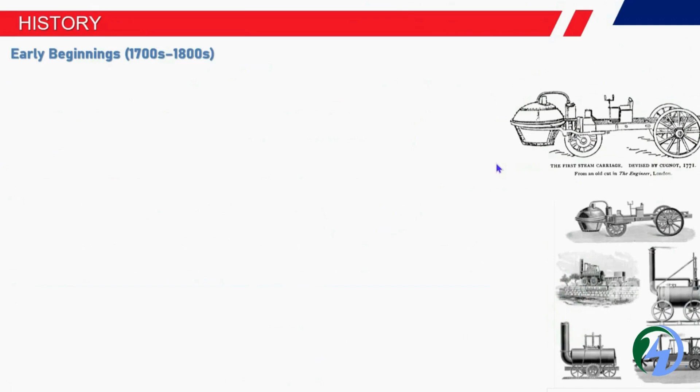This is a small introduction about automotive. To begin to know about its history, it started in the early 18th and 19th centuries with steam vehicles. It was developed by Nicolas-Joseph Cugnot, who built the first steam engine, but later it only supported limited weight and was inefficient.

Then later they came up with the IC engine - internal combustion engine - invented by François Isaac de Rivaz. He developed it using hydrogen, as a combination in the internal combustion engine.

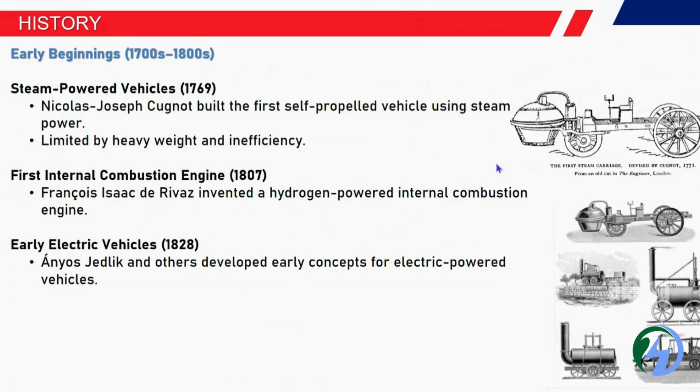Later, in 1828, they started with the battery. Ányos Jedlik and others developed electric powered vehicles.

After that, most of the activity between 1885 to 1886 saw cars drastically starting manufacturing. Karl Benz introduced the Benz Patent-Motorwagen, which is the first modern car, introduced with the internal combustion engine.

Later, Gottlieb Daimler and Wilhelm Maybach built the first gasoline-powered motorcycle, and later they started designing different designs to attract customers.

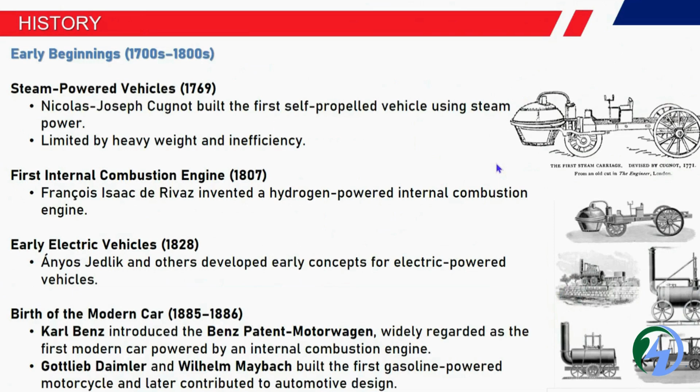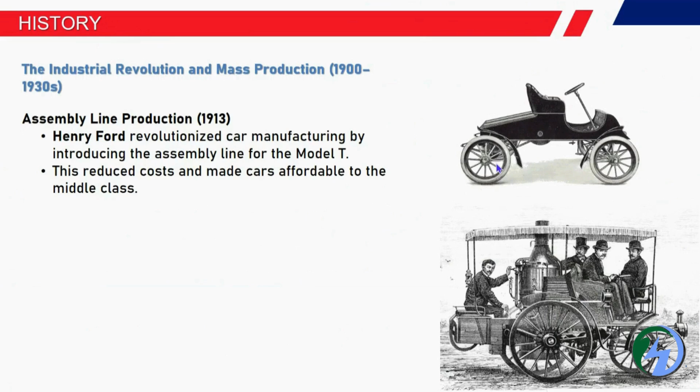Next, mass production started from 1900s to 1930s, where many investors like Henry Ford introduced new models, reduced costs, and made more affordable prices for middle class people. Later, the automotive industry boomed in the 1920s, in the major U.S. market.

Companies started investing more and more in cars, like Ford, General Motors and Chrysler. They dominated and invested heavily in major brands. At that time, cars symbolized freedom and prosperity for those who had them, allowing comfortable journeys.

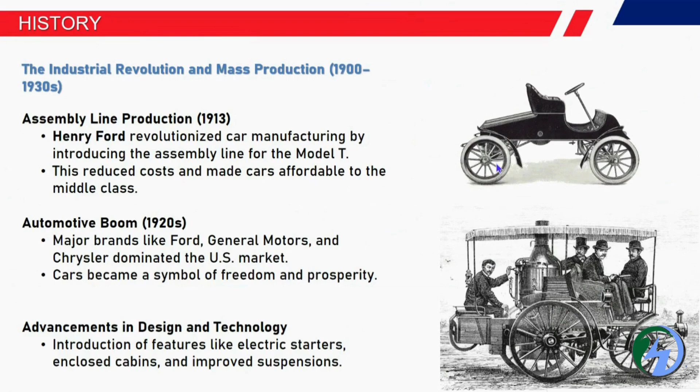They improved the technology and design of different models towards safety, security and comfort. They added starters, cabins, and suspensions. More and more features were added over time.

Later, from 1940 to 1960, many designs were established worldwide, from Russia, Europe and Japan, as other countries started manufacturing cars. Volkswagen and Toyota played a major role in expanding the automotive industry, and in Japan, vendors like Toyota, Honda and Nissan emerged.

Nissan built cars with IC engines where fuel efficiency kept increasing. That's how Japan developed good engines and attracted customers at that time.

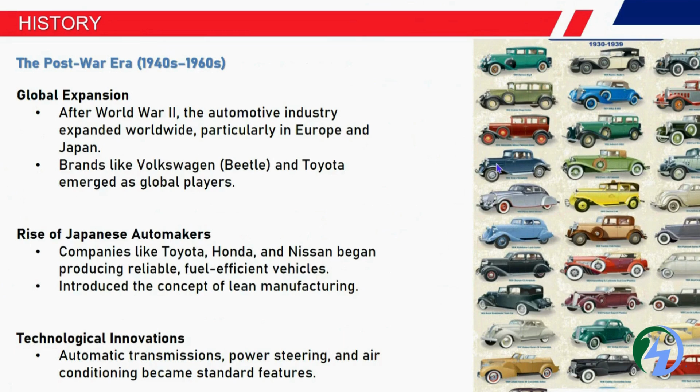Later they started working on safety concerns like airbags and air conditioning, along with comfort-related features such as automatic transmission, gear systems, and power steering. These were introduced slowly to make the journey safer for drivers and passengers.

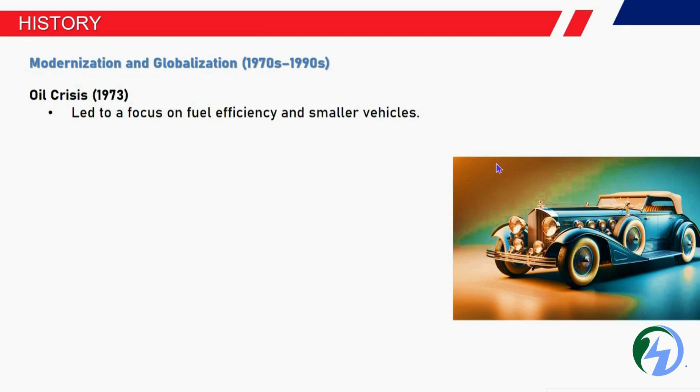In the 1970s to 1990s, particularly 1973, the growing number of cars led to concerns about pollution and oil utilization increasing. This impacted the efficiency and market for these cars.

Thinking about safety and environmental concerns became important. For safety, features like seat belts, airbags, and emission control systems were introduced, along with systems to control how these worked.

In cars, controllers specifically manage functions based on environmental conditions. They also developed catalytic converters as a way to reduce pollution and its impact on nature.

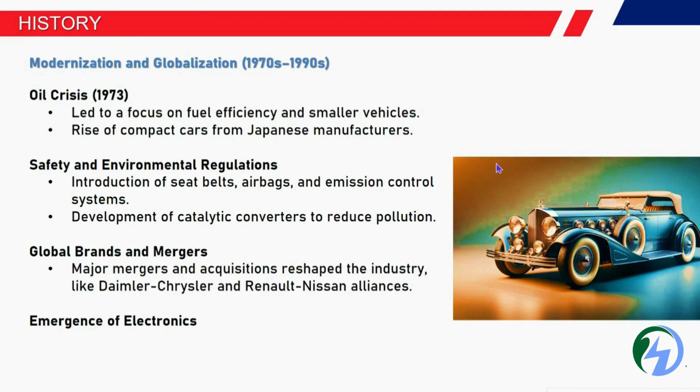Globally, many industries underwent mergers and acquisitions, such as Daimler-Chrysler and Renault-Nissan. These are just some examples. For controlling all the sensors and integrating safety concerns, everything needed to be controlled by one master head—the embedded system.

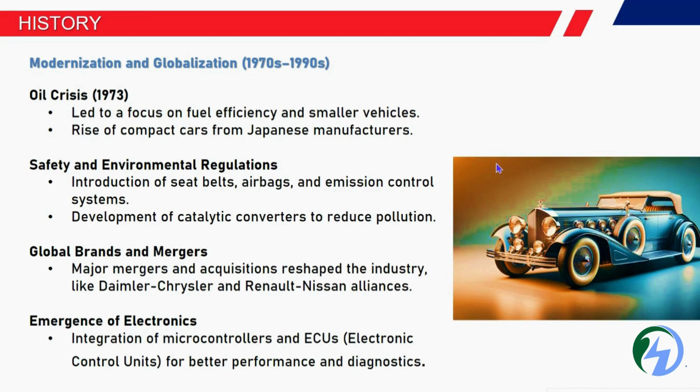The microcontroller was added, giving good performance and allowing problems to be identified quickly if any occurred. This emergence of electronics added more and more capability to vehicles.

In the 21st century, the automotive industry is moving towards electric vehicles. Tesla Motors, founded in 2003, brought EVs into the mainstream with long range and high performance electric cars. Governments and manufacturers across different countries started introducing new norms and standards to be followed, along with subsidies for EVs.

The main concern is about environmental impact from oil, petrol, or diesel, which creates environmental issues. To avoid this, EVs and autonomous vehicles are playing a major role in autonomous driving.

This supports the driver for autonomous activities, like driving on highways, handling cars at edges, or controlling speed. For this, certain limitations need to be in place.

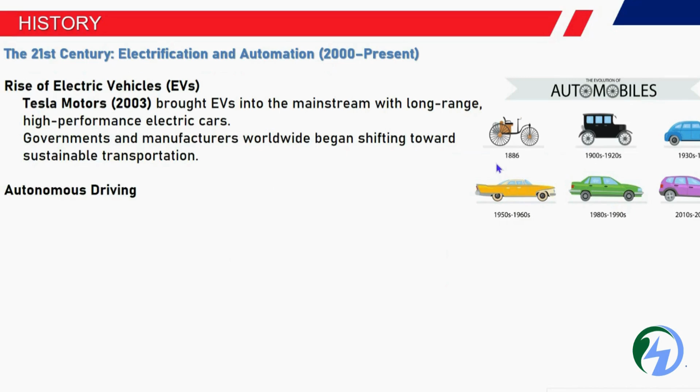Sensors and controllers play a major part, supporting the driver to reach a specific location, with cars designed to drive within limitations—and in some cases, the car can drive automatically without a driver.

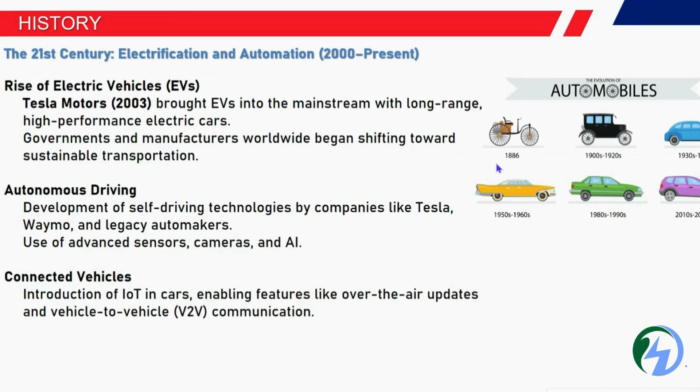Autonomous driving continues working on features that require sensors, cameras, and artificial intelligence, with more coding added to develop these capabilities. Connected services will enable more safety features, along with software security needed when flashing or connecting data.

Next is mostly a combination of fuel, hydrogen fuel cells, and hydrogen hybrid systems, with renewable energy playing a major role for future focus to work on EVs, where the main intention is to reduce pollution and related health issues.

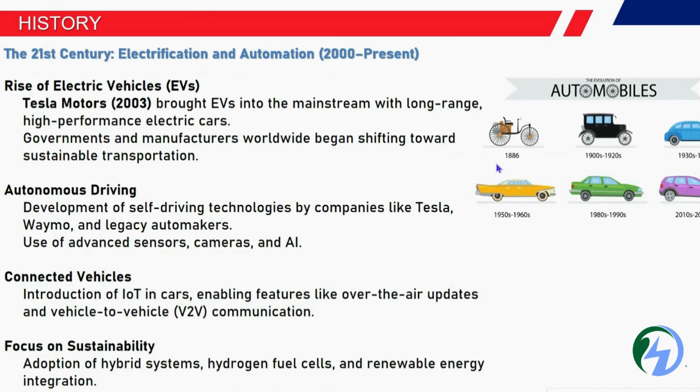The market is completely switching to how we are able to sustain with electric vehicles, and that's how the automotive introduction history started, and we came up with automotive types, which have different designs based on the needed technology.

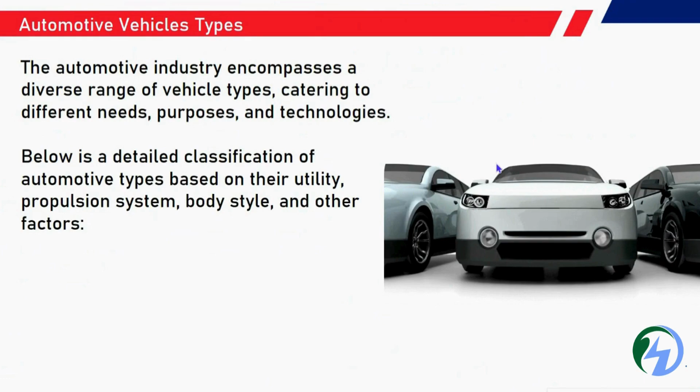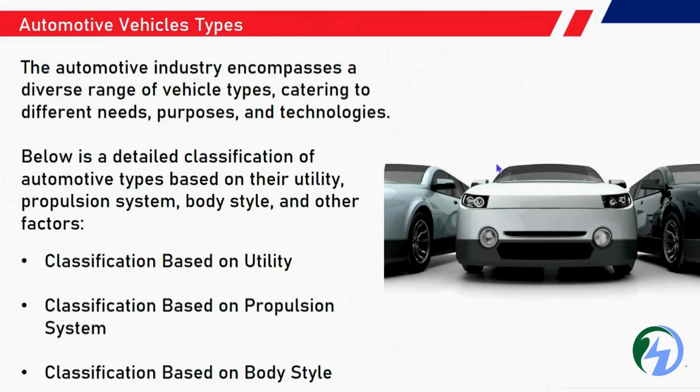There are varieties in body style or design or propulsion system, so many classifications are derived. Based on classification, propulsion system, body style, and utility—whether it's a seven-seater or four-seater—the vehicle will be selected based on user compatibility.

How does this propulsion system get power? It gets it from the engine, as part of a combustion engine, which transmits the power to the wheels.

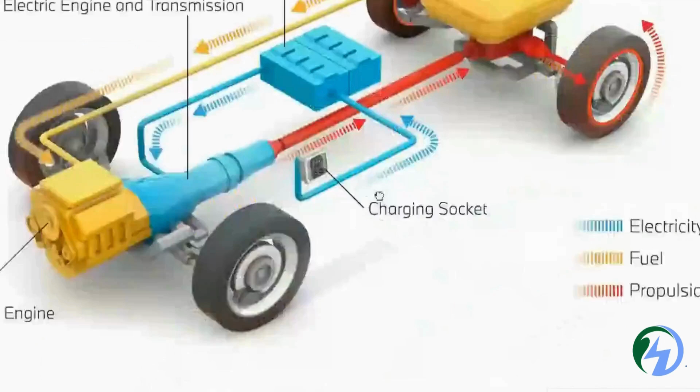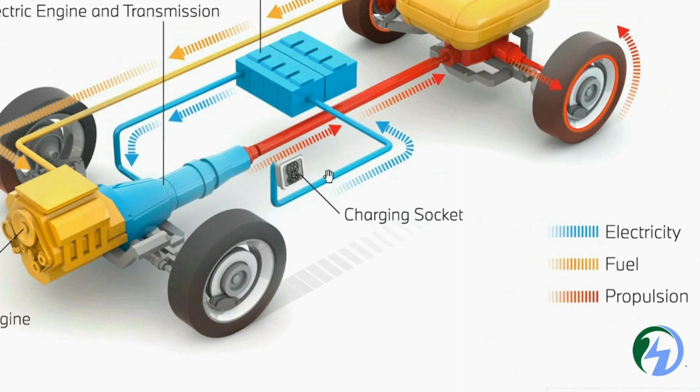You can see the major thing here is electricity—the blue part which has a charging socket, part of EV charging. This charges the batteries, and the battery gives some part of power to the transmission. It's a combination of electric engine and transmission.

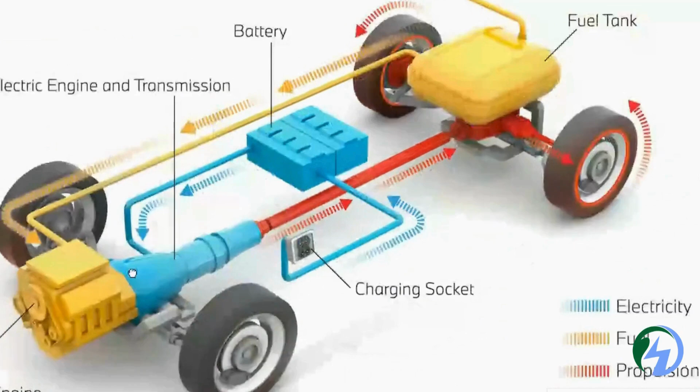Once the combustion engine starts, power is generated, and for the engine we need power supply—that's where the fuel tank comes in, pumping fuel to the engine. Everything is a combination of EV and electric fuel systems.

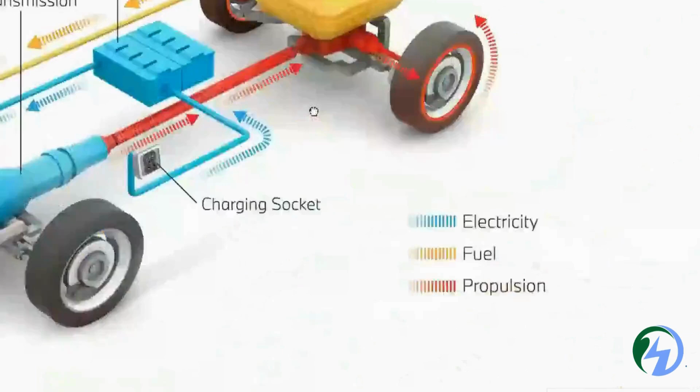So the propulsion system plays a major role. Based on this classification, passenger vehicles, and even trucks and some other commercial vehicles, work on the same principle.

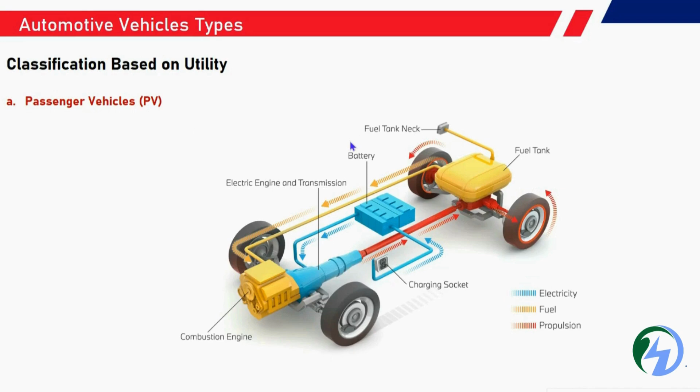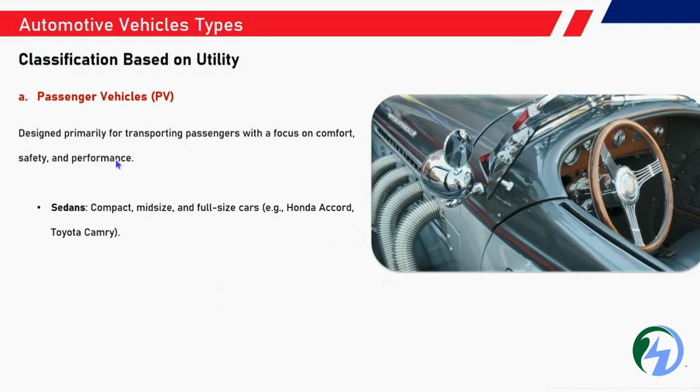The main classification of passenger vehicles focuses on safety, comfort, and performance. There are sedan, compact, mid-size, and full-size cars available, like the Honda Accord or Toyota.

Some are SUVs, sport utility vehicles, which have higher ground clearance and off-road capability. Examples are the Toyota Fortuner and Ford Explorer.

Next is the hatchback—smaller cars with rear access through hatch doors, like the Hyundai i20 and VW Polo, small cars that enable passengers to drive with comfort, safety, and performance as primary factors for transporting.

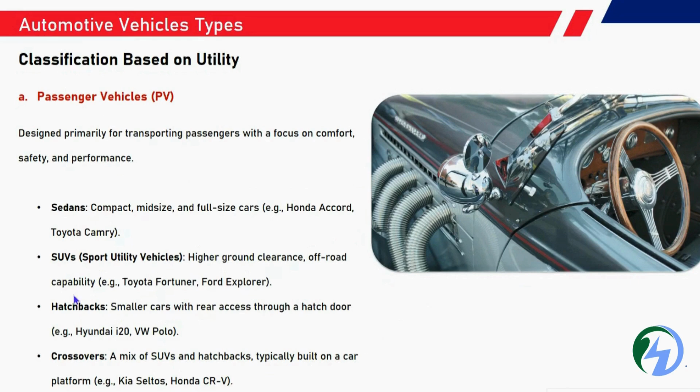Next is the crossover, a combination of both SUV and hatchback, typically built like the Kia Seltos and Honda models. These are the latest examples of how Seltos, SUVs, hatchbacks, or crossover models are available for passenger vehicles.

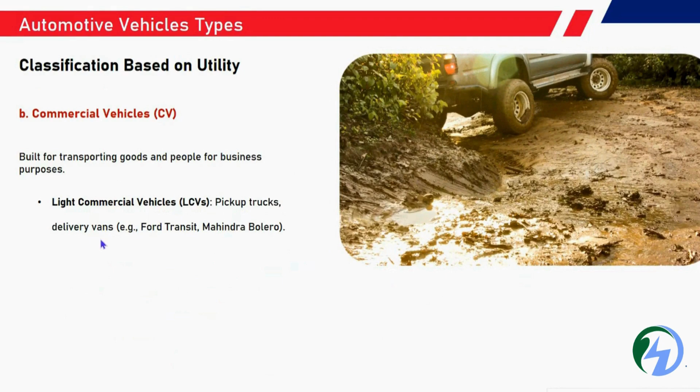Next is commercial vehicles, built for business, for transporting goods and services for people's activities. There are light commercial vehicles, LCVs, like pick-up trucks that deliver products, and vans—most companies being Ford Transit and Mahindra Bolero.

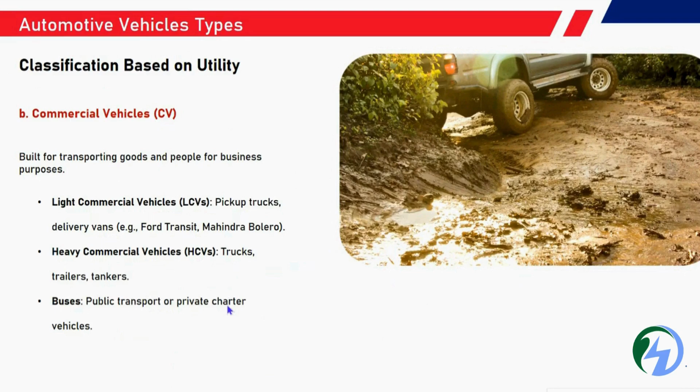And heavy commercial vehicles like trucks, trailers, tankers, and buses, as we know, for public transport and private charter vehicles. Next is the special purpose vehicle.

These vehicles are built specifically for some of the emergency vehicles like ambulance or fire trucks, or the construction vehicles or agricultural vehicles, and even for hill climbing purposes.

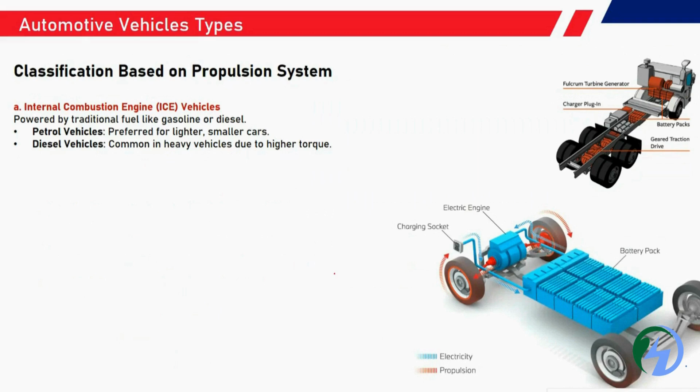How is this propulsion system working for these vehicles? The internal combustion engine vehicle is powered by gasoline or diesel. Petrol vehicles are preferred for light and smaller cars. Diesel vehicles are commonly used for heavy vehicles due to the higher torque required. Remember, petrol vehicles are lightweight, small and efficient for driving, but have low torque compared to diesel. Diesel vehicles are commonly used in heavy vehicles due to the higher torque.

Electric vehicles operate with a combination of motors and batteries. The electric batteries have efficiency to drive the motors in different conditions. Full electric vehicles with full rechargeable batteries, like the Tesla Model or the Nissan Leaf, are some examples.

A hybrid electric vehicle is a combination of both IC and electrical motor. In the example of an electrical vehicle, there is only a battery pack and a motor. Once this motor rotates, the wheels start rotating. Here we don't have any propulsion system, but for the engine that is part of the IC engine, we have the propulsion system. The propulsion system plays the major role in driving the wheels, but here, with the help of the motor, the vehicle is driven.

Next we have the plug-in hybrid electric vehicle, PHEV, similar to the electric vehicle, but it can be recharged externally. With the help of the recharger, we just plug in and utilize it. There are also some alternative fuel cells, which we are going to understand in detail.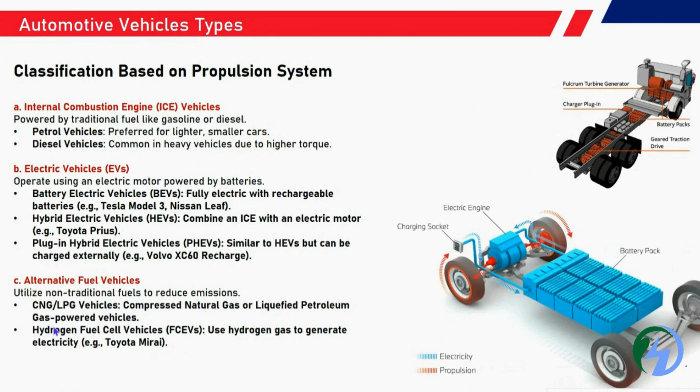How is this classified in case of trucks - you have the plug-in and batteries, or some gear traction should be there. All four wheels should get some force, but the main player will be the front wheels. The front wheels get the propulsion to drive in certain conditions and at a certain stage where it is able to drive the torque.

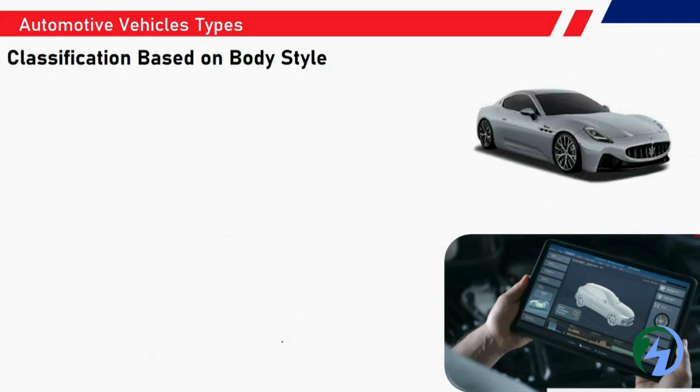Next, how is the body design? One more factor is that propulsion is the way the vehicle movement can happen through the wheels. Now looking at the design of the body - we cannot design the body however we like on top. The body style is what makes customers attracted, and the first one is the sedan.

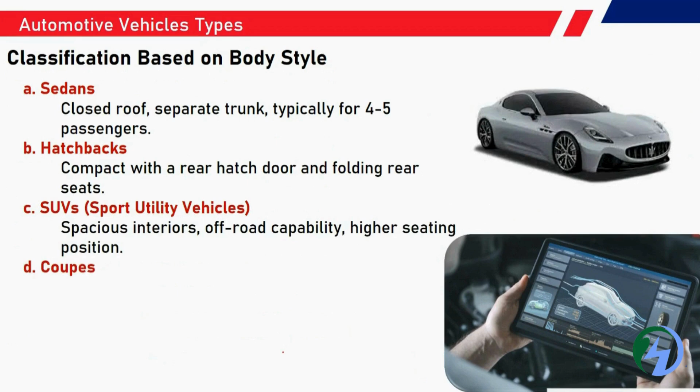The sedan has a closed roof and separate trunk, typically for 4 to 5 passengers. The hatchback is compact with a rear hatch door and folding rear seats. The SUV, or sports utility vehicle, is used for off-road and on-road driving. The coupe is a two-door sporty car with a sleek design, and the convertible has a retractable roof. Station wagons have a roofline with more cargo space. So this is an example of how automotive vehicle types come with different body styles.

Next will be the part about driving modes.

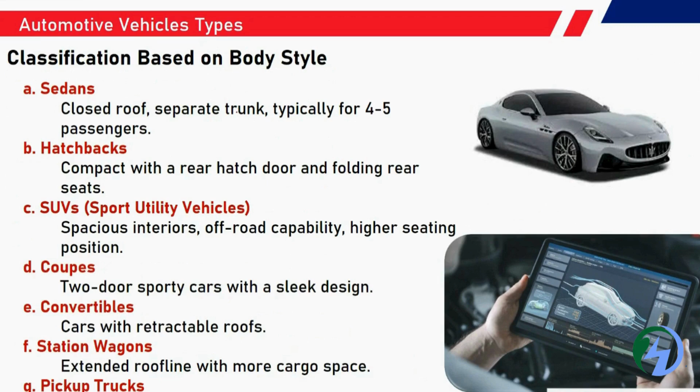So driving modes, like we have different types of driving modes, like two-wheel drive, meaning the front wheels will get more power, and based upon that the vehicle will move. So the engine power is sent to the front wheels. Commonly we see this in sedans and hatchbacks. And some are rear wheel drive, where the power is sent to the rear wheels. Commonly sports and luxurious vehicles need more force from the back wheels.

So this is 2WD, we say two-wheel drive, and four-wheel drive is 4WD. This means the power is distributed to all four wheels. So whether it's on road or off road, the vehicle should get power equally, raised to all four wheels. The term AWD means continuous power to all wheels.

It's designed for on road and light off road conditions also, because four wheel drive and AWD are similar, both are the same. There's no much difference, but the differentiation is that a four wheeler will support four wheels, and in some cases it could be six wheel or eight wheel vehicles. So how that power is distributed depends upon the vehicle condition. Just to differentiate, 4WD and AWD - all means it could be six or four wheels, and how that power is distributed for the vehicle.

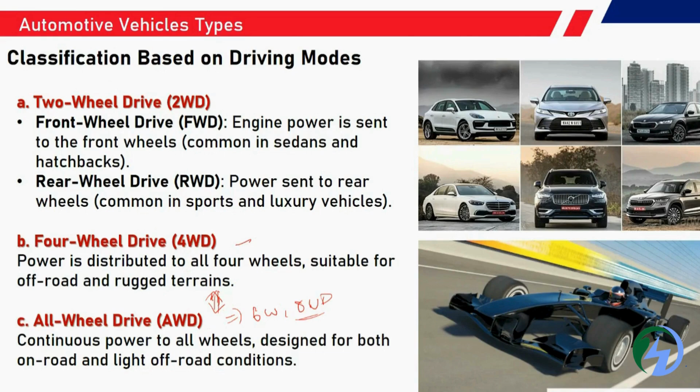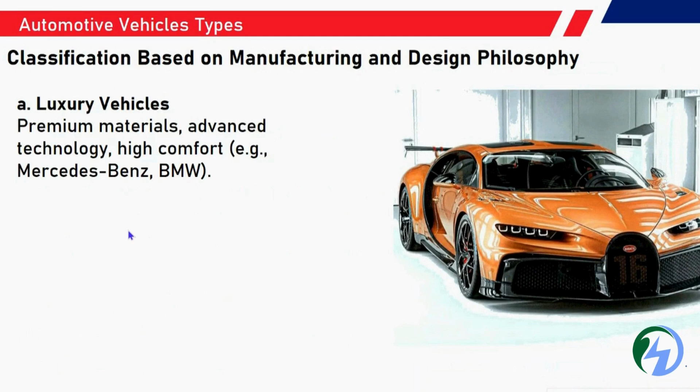Next is how the manufacturer's design philosophy happens. First is the luxurious vehicle - premium material, advanced technology, high comfort - Mercedes-Benz and BMW work on this product. Sports cars are high performance with more focus on speed, like Porsche 911 and Ferrari in the sports market, and economy cars are budget friendly and fuel efficient.

So budget is the one thing - we cannot go beyond it depends upon the budget. If the budget is adding more because of the brand, and moreover the quality of the build, and next comfort and safety will play a major role if the budget is high. If it's less, the comfort and luxury is also limited for some features.

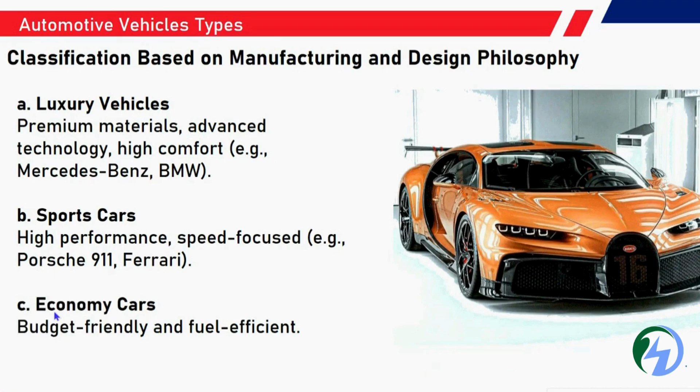Another factor is fuel efficiency. Fuel efficiency utilization is very important for vehicles. If a vehicle gives 10 kilometers for 1 liter, it will be less compared with other vehicles. If it's going 20 kilometers for 1 liter, the efficiency is good - the utilization of power is more than for 10 kilometers. So that's also one more factor - we need to see how the mileage is, and how the engine is playing and supporting us in reducing fuel consumption.

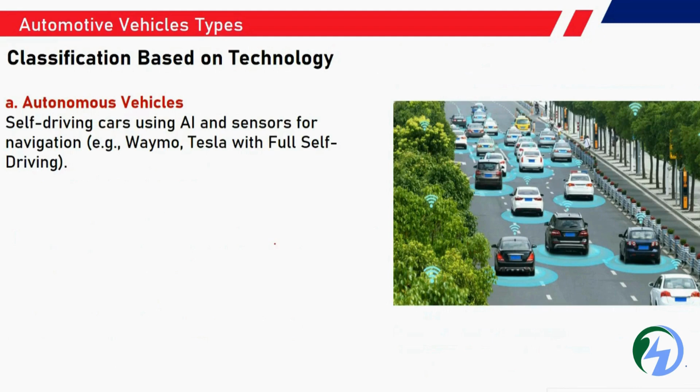And other features are added for autonomous vehicles - AI features are added, and sensors help us know where the vehicle is traveling and how the direction is happening on the road. It helps the driver make the journey smooth. Some like Tesla are full self-driving vehicles, and some connected vehicles work in real time. The ECUs, the controllers in the cars, will get updates every time, and use security features to enable sensors to work on time.

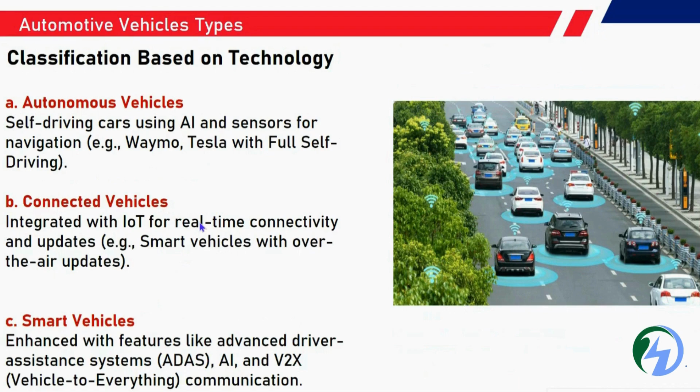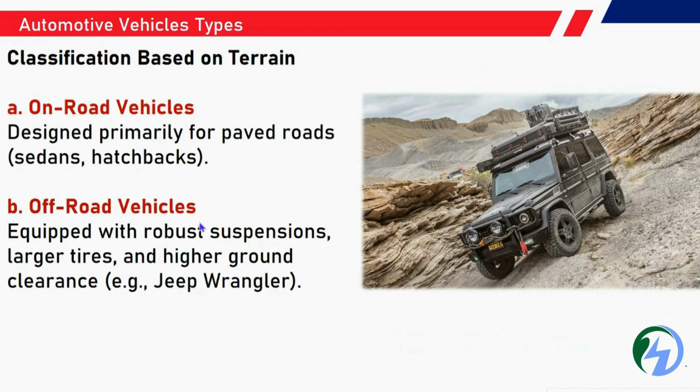And some smart car vehicles - smart vehicles means whether small cars or big cars, whichever it may be, they get software updates regarding smart cars. So features are being integrated more and more to attract customers and passengers. Based upon that, terrain like off-road vehicles - mainly sedans and hatchbacks help for on-road driving. Off-road vehicles are equipped with robust suspension, larger tires, and higher ground clearance. Jeep Wrangler is one example.